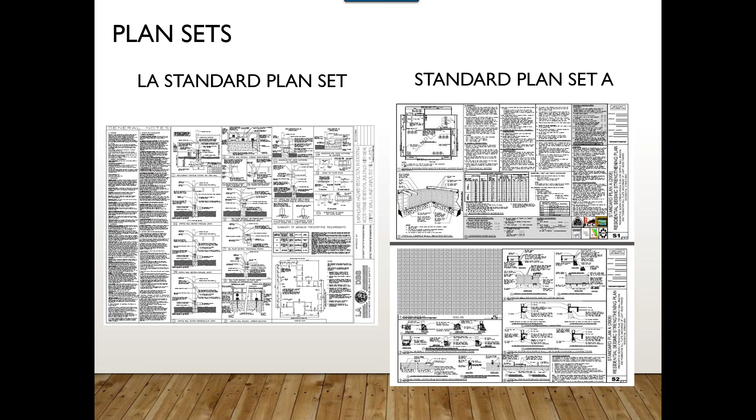So the type of retrofit that is prescribed in Chapter A3 and in the plan sets is very, very simple. It is sill plate anchorage, and in this picture we have shown new anchor bolts. In this case, the reason that you have a block in there for the anchor bolt to go through is that it's very common to find studs in the cripple wall space, the crawl space walls, that are 2x4 or 2x6, and then the mud sill is wider. Oftentimes it's a 2x6 or 2x8.

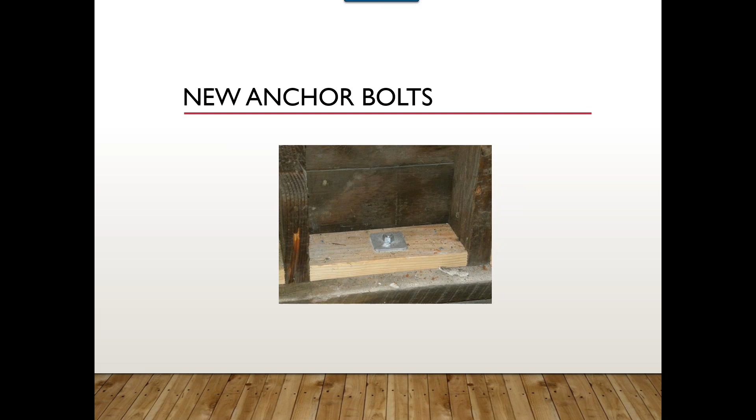And so you need to have that nice flat surface to put the plywood up against and create that edge nailing surface. And so if you're putting in anchor bolts where the stud is shorter or not as wide as the mud sill, you'd need to put in this blocking. So this is when you have sufficient room under that crawl space to get in there with a roto hammer to put in an adhesive or expansion anchor.

Where you have what we call a stem wall condition, so you have that lack of anchor bolts, but you don't have any cripple wall. The floor sits directly on the mud sill, which is now sitting directly on the foundation. You can come in and you can bolt the house to the foundation with new foundation plates. This is a proprietary foundation plate here, easy to get at Home Depot.

You can also make the foundation plate. There are specifications on the plans that allow you to fabricate one, but these are pretty simple to get. They're screwed into the mud sill, bolted into the concrete foundation, and you can see it comes in from the side, so you don't have to worry about being able to get in there vertically with a new anchor bolt. So this mud sill connection is, once again, just requiring sill plate anchorage.

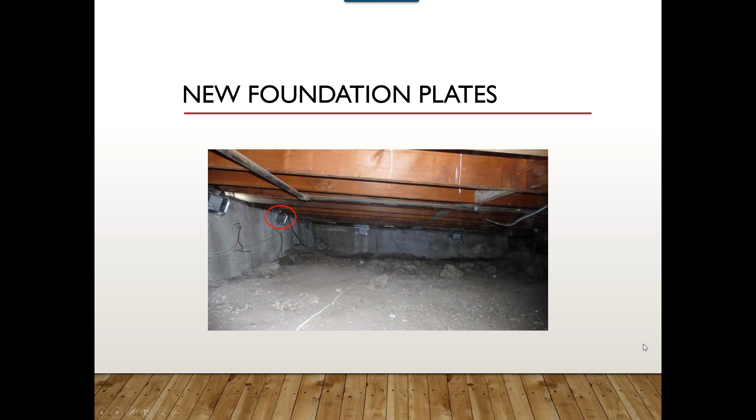Now you are going to also go in, and I think you can see right up in here, and put in some connections that I'll show you in the next photo, or the photo after that. So when you do have cripple walls, or the short stud walls that surround the crawl space, and a cripple wall is less than a story, so 4 feet or shorter.

You can see now that none of this diagonal bracing here is providing you any seismic strengthening, and you've only got the original finishes, maybe straight sheathing or diagonal sheathing, and then the original maybe stucco or shingles on the outside. And the idea here is that you're providing stiff plywood bracing on that cripple wall. Now, this picture makes a nice clean picture showing you that plywood. It's important to note that you also need to go in and put vent holes in the plywood.

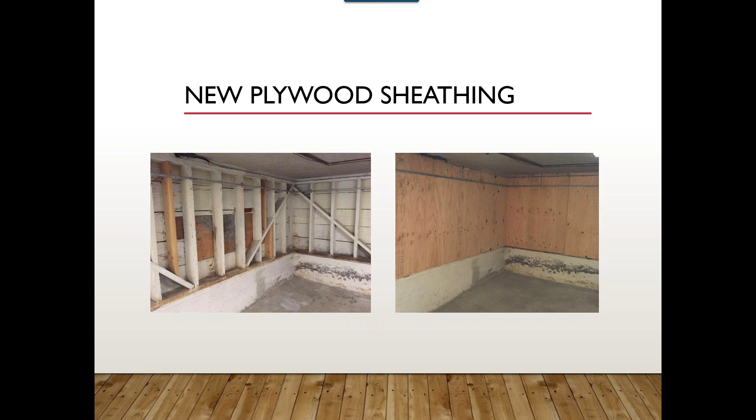And I'll show you a sketch a little bit later on that shows that if you correctly position the vent holes, you can put them near the anchor bolts so the inspector can come in and see those anchor bolts and do their inspection in only one visit. So this gives you an idea of where that plywood goes. Now, it's important to note that this plywood bracing is creating a shear wall. So the nailing is as important as any shear wall that they're creating in any seismically strengthened or new building.

The idea is that nails should not be overdriven, and you can add a nail if you accidentally overdrive it. They should be appropriately spaced from the edge of the plywood. Essentially, it's 8 penny nails at 4 inches on center, and it is a shear wall. So the edge nailing, 8 pennies at 4, field nailing in between at 12 inches on center, and they need to properly use that nail gun.

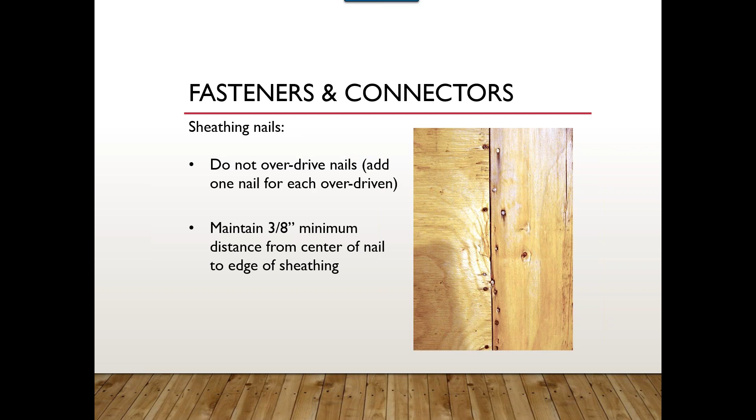When you overdrive a nail, essentially you perforate that one ply. You can reduce the capacity of that nail by 20% by just barely overdriving it. So we encourage the contractors to treat these like shear walls. Make sure that the guy who's using the gun knows how to do that.

Finally, to complete the load path, the idea here is we're connecting the wood part of the house to the concrete foundation, is that you're connecting the floor to either the mud sill, if it's a stem wall condition, sitting right on that foundation, or to the top plate of the cripple wall. And here you can see these clips are now connecting. This is either a block or a rim joist here to that top plate of the cripple wall. If this was a mud sill, you would put them in the same place. And all of the Chapter A3 and the plan sets all have the size and spacing of these clips that are to go in to make that connection.

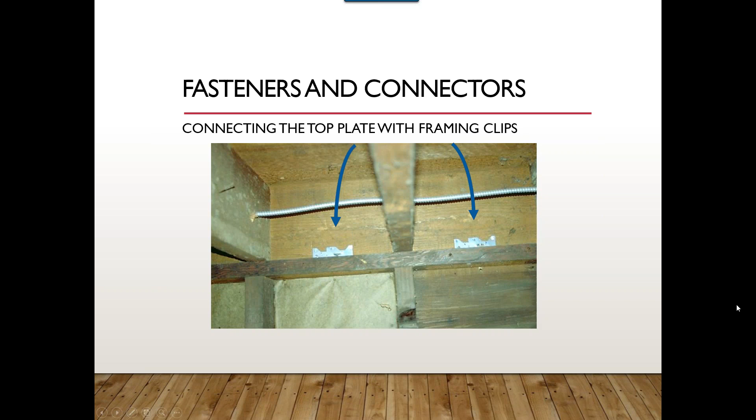Now, it's important to note the things that they should not be doing. One of the legacies of the voluntary retrofit are folks that, frankly, there were a few contractors out there, fortunately not all of the contractors, but a few, that were really not aware of what they should be doing, and essentially would use just about every shiny new fastener on the interior of the crawl space.

Now, if you have a condition where there's a post that's perhaps damaged by termites or by water damage, or it's not centered on the footing, and you're going to go in there and replace it, this is great. Use a little post cap and put it in. This is not part of the earthquake brace and bolt retrofit. All of the retrofit is done at the perimeter of the crawl space. So this is great to do this for the homeowner. Let them know that you're going to do that, get their permission.

But this kind of nonsense here, where there are connectors on these interior posts, are not necessary. This hold down probably has a capacity of 5,000 pounds, and I don't know what it's attached to down here, but we have seen this, and so we've tried to put a stop to this. There is no work required at the interior, no gussets, no metal fasteners. All of the work is done at the perimeter of that crawl space.

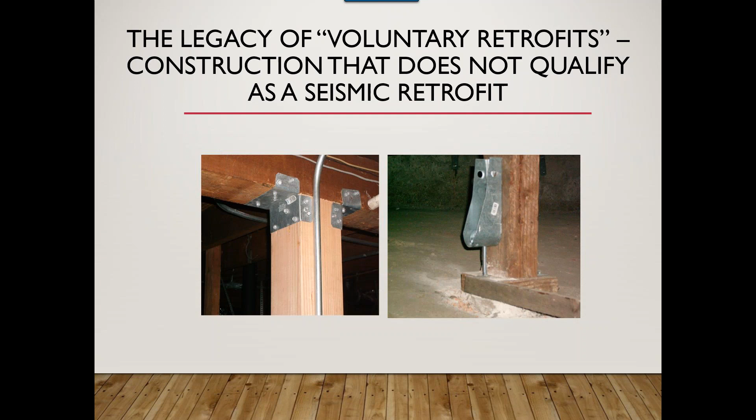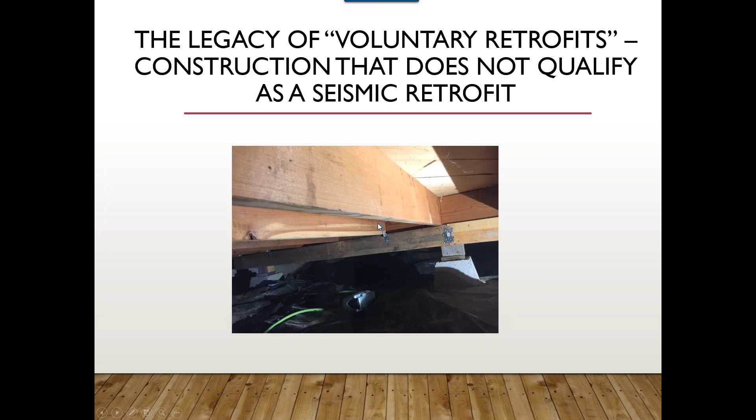So, and we, as I said, fortunately haven't had a lot of contractors. So here's another example. Once again, if they want to come in and they want to replace a post, you don't need to put any of this hardware for an Earthquake Brace and Bolt. It's all done at the perimeter.

We want to just explain a couple things about what a qualifying retrofit is. Once again, we're installing anchors, and so they're either expansion or adhesive anchors if you can come down from the top, or an approved foundation plate from the side, plywood or OSB sheathing. It says in these documents on the exterior, but it really should be done on the interior, and I caution people in that when you touch the building envelope, sometimes you're touching archaic, beautiful, maybe redwood siding. You're disturbing the waterproofing of the house, and it's not necessary. You can come right in and put that plywood on the inside of the crawl space.

We've only had a couple of people attempt to do it from the exterior, and so we try and dissuade people from doing it. And then of course here's that sketch showing you're putting in anchor bolts, you're putting in the plywood, you've got the vents. The vents are centered over the bolts so you can see them, and then you've got those clips at the top.

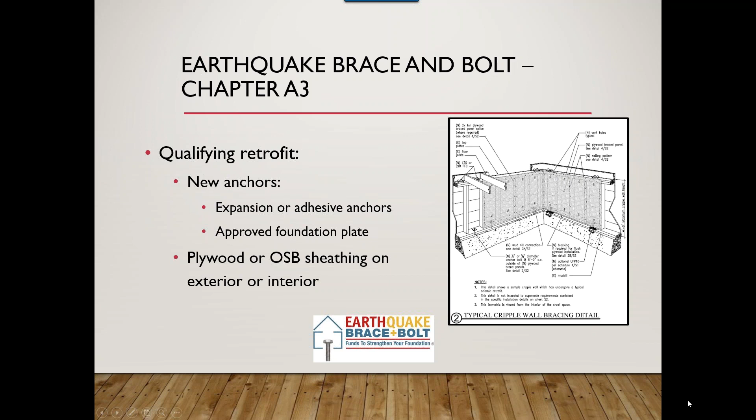And an engineered retrofit, once again, is allowed by Chapter A3, but it's required for cripple walls greater than 4 feet, or when we have unusual conditions. For example, sometimes you'll have a discontinuous foundation on the perimeter, but there are other walls that can take the earthquake forces. And so an engineer can come in and say, well, if you retrofit this wall, you've got plenty of wall. You don't have to come in and build a new footing here.

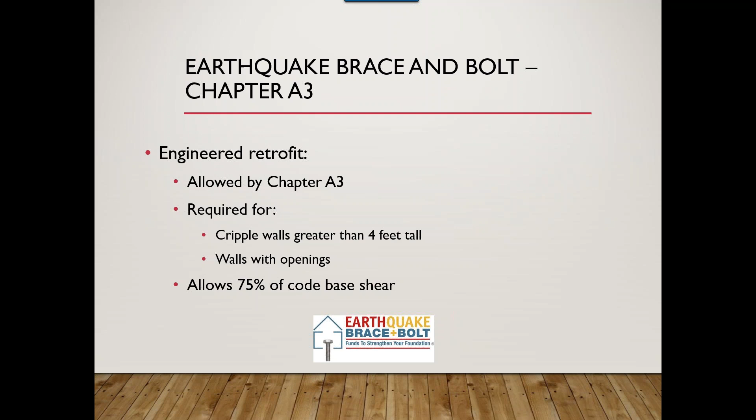An engineered retrofit is allowed to use 75% of code base shear. And essentially, even if you have an engineered design, it is not a holistic retrofit of the entire house. It is simply a retrofit of that anchorage and cripple wall bracing.

We want to point out that building departments throughout the state are all allowing for the retrofit of crawl space, even when there are rooms or portions of the house that have slab on grade. For example, very common to have a parking garage that has concrete slab. Sometimes you'll have an addition. Sometimes you'll have maybe a sunken living room or one room that's slab on grade. The idea is to use Chapter A3 or the plan sets to retrofit the complete crawl space and utilize the perimeter of the crawl space as the perimeter walls that you are retrofitting.

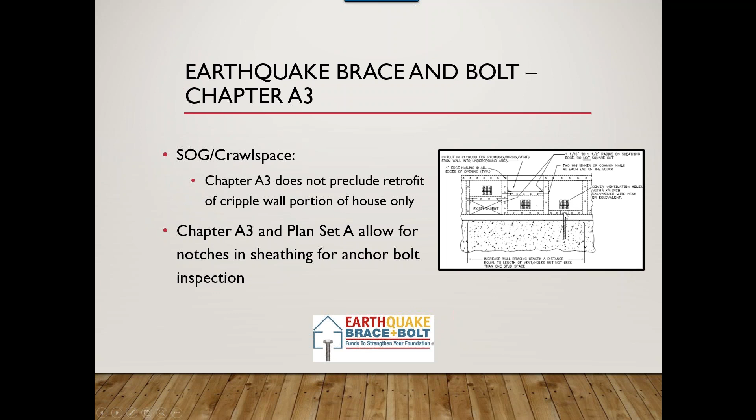And then I wanted to just point out that it really saves inspectors a trip if you can position those vents over the anchor bolts so that they can look down in. Then they're not having to come out and do 2 inspections. It's also important to note that it's not the intention of the Earthquake Brace and Bolt program to tell or instruct building departments how to do things, but rather we try and pass along best practices of other building departments, things that we've learned that they're learning.

And it's important to note that at the beginning of the program we had a lot of people asking about anchor testing. And the Structural Engineers Association of California's existing building committee did issue a commentary on Chapter A3 that recommends that anchor testing is not required. They point out that for the 4 foot or less cripple wall, they are all in shear. And if you have an engineered retrofit with hold downs, then you would of course utilize your normal testing procedures. But for these anchor bolts on the basic cripple wall retrofit, it is not necessary.

So that's the end of the technical portion, and just want to mention to you that when we get technical questions, we refer homeowners and contractors back to the building department. As I mentioned, it's not our intention to dictate the rules.

The idea with using the building department and the typical permit process, of course, is to utilize a system that's already in place to protect Californians and protect, of course, their biggest investment, their home. So now I'm going to turn this over to our customer service manager, Mark Grissom, who will describe the program itself and the one little area where we really need to coordinate with you, which is on the building permit. Thank you so much, and we look forward to working with you.

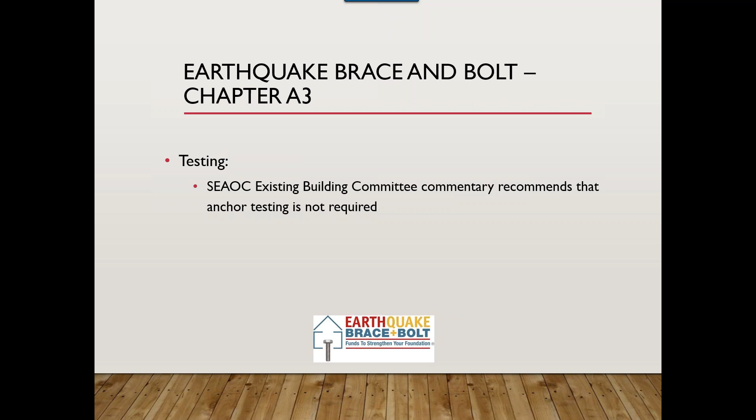Hello, as Janelle said, my name is Mark Grissom. I'm the Customer Service Manager for Earthquake Brace and Bolt. There is my slide. This first one is just to give you an idea of what it is that we're trying to mitigate, the reason why we're out here doing this program. These were photos from some houses that were in the Napa Earthquake in 2014.

And as you can see, definitely, they've come off their foundation, and this one is pulled away from these steps here. As you can see, that's really a hardship for families to not be able to go back and live in their homes after something like this occurs, and we would like to try to mitigate that as much as possible.

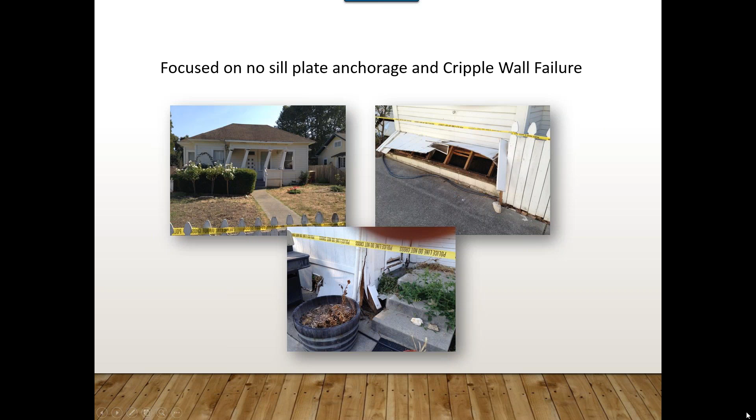We were funded from the CEA Loss Mitigation Fund. We usually are. We were lucky enough to have 2 years of financing from the state of California, 2016 and 2017, which allowed us to expand our program each one of those years. We were able to do 1,000 extra retrofits thanks to the funding from the state of California. We also had one FEMA grant previously, and that was the Napa program that we ran.

For 2019, we have another FEMA grant that we've received. That's where our funding for 2019 is going to come from. We also have additional notices of intent for grants in for 2019. So while we have some funding now for 1,000 retrofits, we're hopeful to get additional grants as the year goes on. So there's more to come there.

A qualifying house is constructed before 1980. It's wood construction with a raised first floor and continuous concrete foundation. It lacks sill plate anchorage and/or cripple wall bracing. Sometimes it's one or the other. It's not necessarily always both, but many times it is. And it's on a low slope lot.

We sometimes get questions from homeowners in particular about the low slope lot. In most cases, even if the lot has slope, they're going to qualify. It generally has to be relatively extreme, where you end up having a cripple wall as it slopes down being over that 7-foot mark that Janelle was speaking about before. So even if they're on a slope, if their cripple walls don't exceed that 7-foot limit, then they're going to be fine.

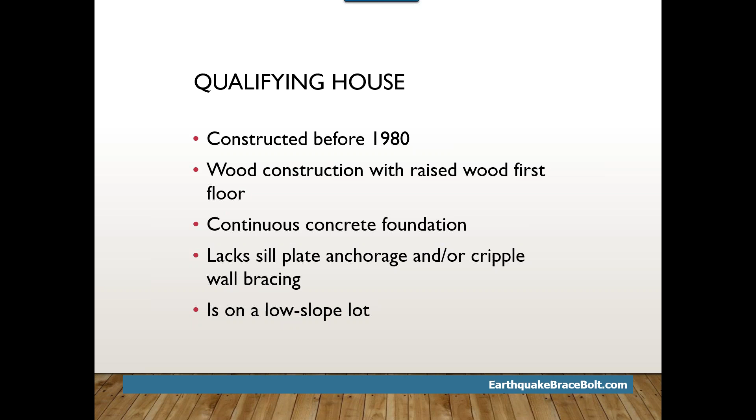We have a website. It's earthquakebracebolt.com, where we funnel people to if they have questions about the program. We do have a call center, and we have people, my staff here, that answer emails. But really, almost anything you'd want to know about the program is on the website.

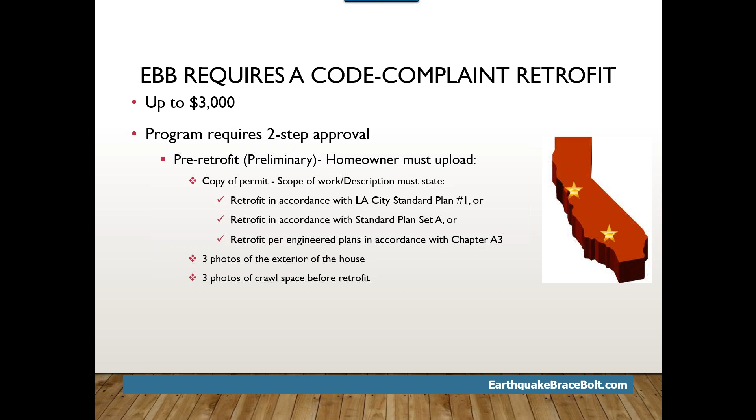So once they've provided us all that, we've checked it out, everything seems to be in order, we'll approve them for the preliminary and allow them to go ahead and do the work. So none of the work should have been done prior to that. Once we give the okay, they can go in and get started. Once they're done, we want to see a copy of the signed final permit. If you happen to have a website that lists the permit on there and will tell the status, so it'll say that it's finalized, that's great. We'll go in and actually double check the signed off sheet against that, just to make sure that they both are telling the same story.

We want 3 additional photos of the crawl space now that the retrofit's been completed. So sort of proof of concept. We want to see that if it was a house that looked like it needed both bolting and bracing, that we see both of those things. In certain circumstances in the past, we've come across issues where a house definitely needs both and we only see bolting and no bracing. And then we have to reach back out to the homeowner and or the contractor to find out what the issue is.

Did they just sort of jump the gun, which has happened in some cases, and they take the picture because they want to show us the bolting, and then they did the bracing afterwards and didn't supply us with a photo of that? Or is it a situation where they only did the bolting and there was no bracing done, in which case it doesn't qualify. So that's the type of thing that we're looking for.

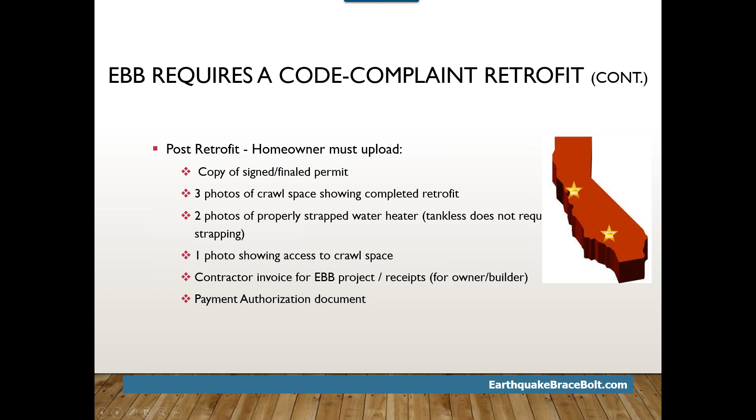We also have the CEABB program in 2019. The way it runs is very, very similar, almost exact with the EBB program. That's why we don't really have anything separate. The only really main difference is the way the people get to participate. CEABB is specific to policyholders. So they also have to have a house of a certain age, and other qualification things that are slightly different from the EBB program, but the way the program itself runs once they've been accepted is really the same.

For 2019, we will be inviting over 14,000 people across 202 zip codes in California. Reimbursement's the same, up to $3,000. The retrofit is the same as in the EBB program. It still has to be in accordance with Chapter A3.

And both the LA City Standard Plan and Plan Set A are acceptable construction documents. We have a contractor directory available online on our website. It is provided to contractors who go in and take our training, take a quiz, and they have to pass the whole quiz 100% all the way through, and then they're allowed to be on the contractor directory.